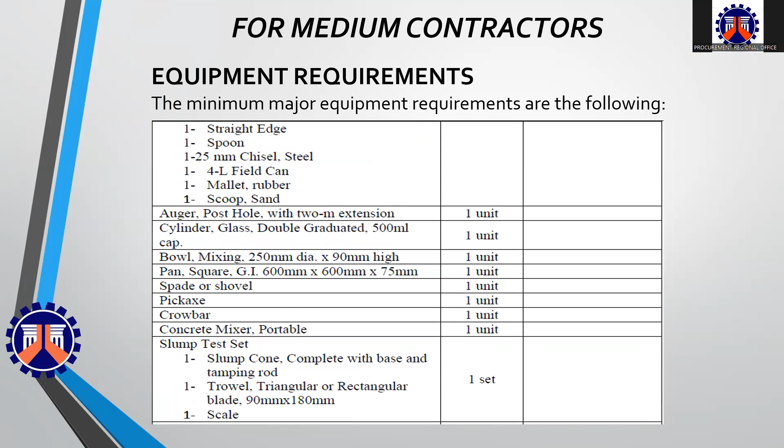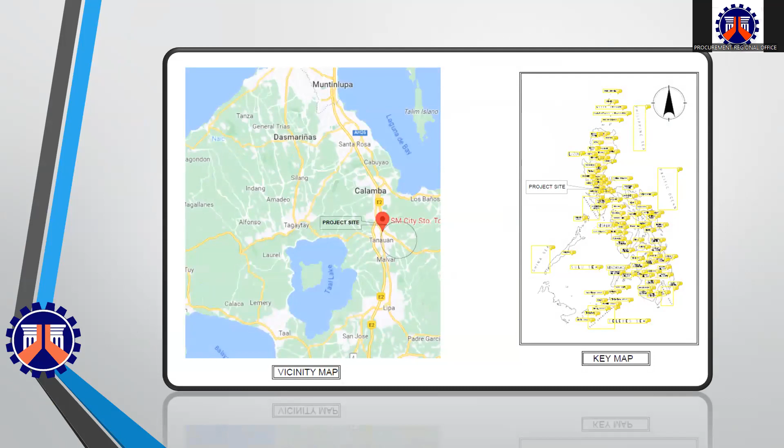Contract ID number 24D00076. Showing you the plans. Scope of work.

Asphalt overlay construct with 50 mm thick of item 310(1)c bituminous concrete surface wearing course and with 50 mm thick of item 310(2)c bituminous concrete surface binder course having a net length of 7.832 lane kilometer.

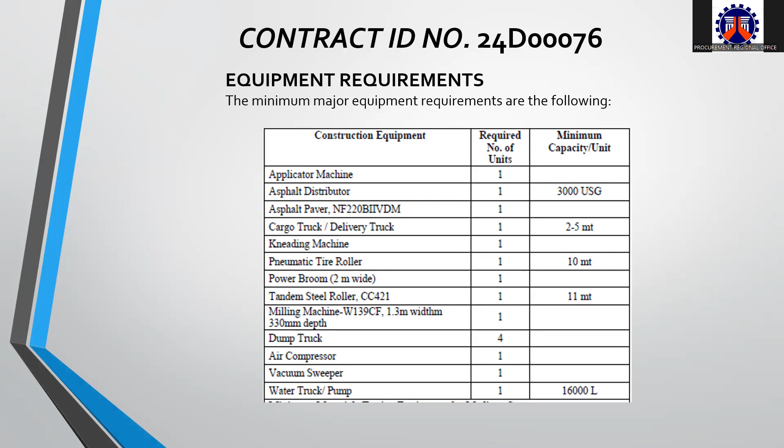Equipment requirements. Showing you the minimum major equipment requirements. Manpower requirements. The minimum work experience requirements for the key personnel are the following.

The approved budget for the contract is 153,630,895 pesos, and the contract duration is 300 calendar days.

The major category of works and the similar categories of works. The source of fund for the project is FY 2024 GAA for DPWH Infra Program.

For contract ID number 24D00095, showing you the vicinity map and key map.

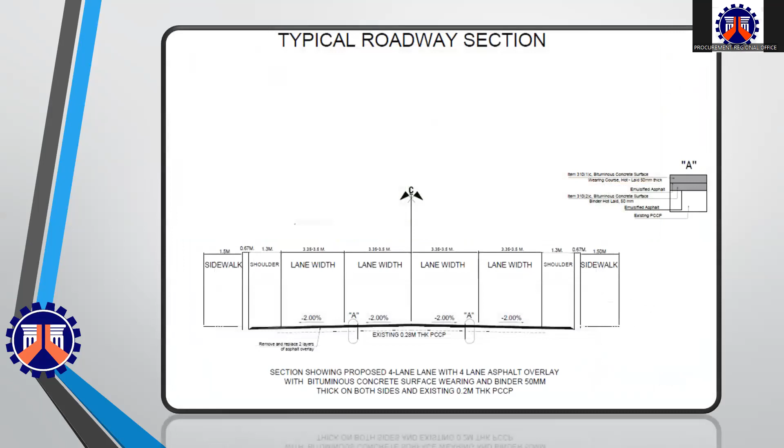Scope of work. Asphalt overlay of the Daang Maharlika, K56 to K56 plus 115 in Calamba, Laguna.

Existing asphalt overlay will be removed and replaced with 2 layers of bituminous concrete surface with anti-rutting additive 50 mm thick. Reflectorized thermoplastic pavement markings will be applied later.

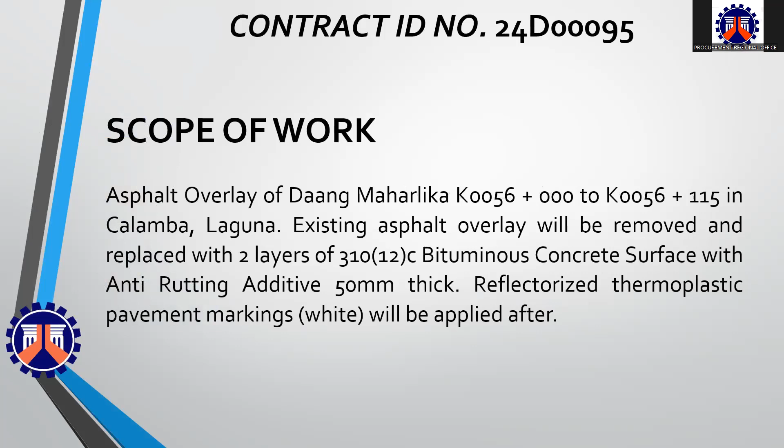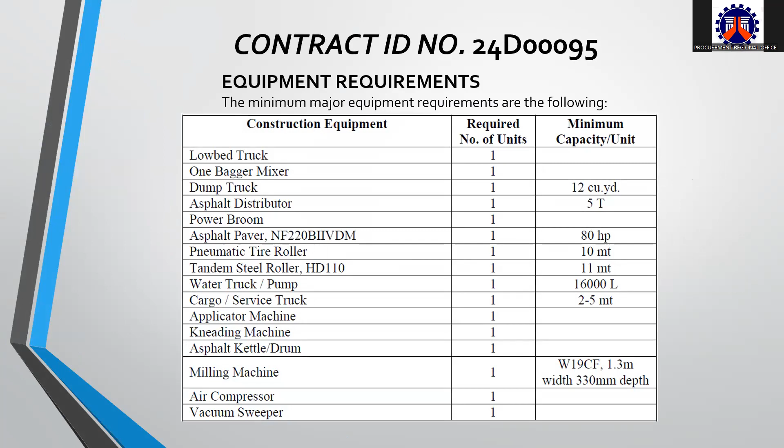Equipment requirements. The minimum major equipment requirements are the following. Manpower requirements. The minimum work experience requirements for the key personnel are the following.

The approved budget for the contract is 11,375,420 pesos, and the contract duration is 45 calendar days.

The major category of works and the similar categories of works. The source of fund of the project is FY 2024 GAA for DPWH Infra Program.

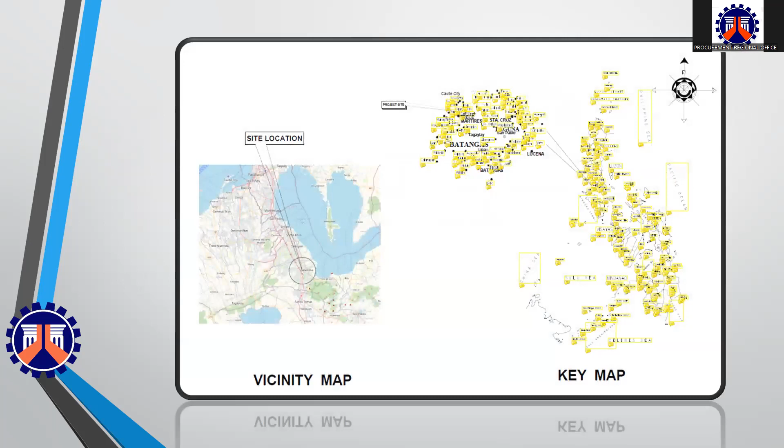Per contract ID number 24D00096, Rizal Shrine Road. Showing you the vicinity map and key map.

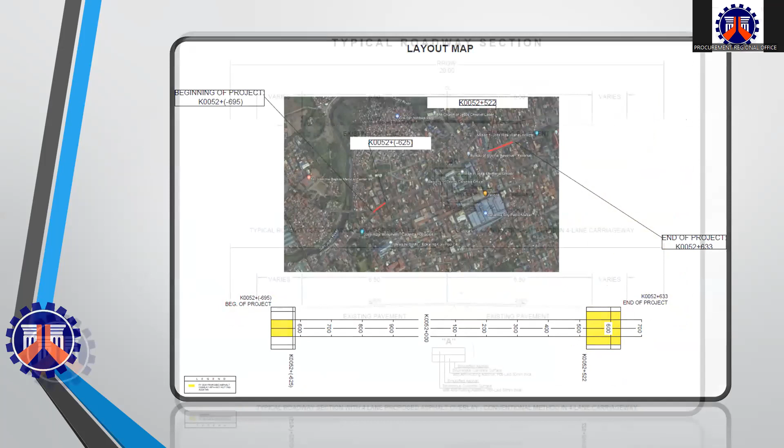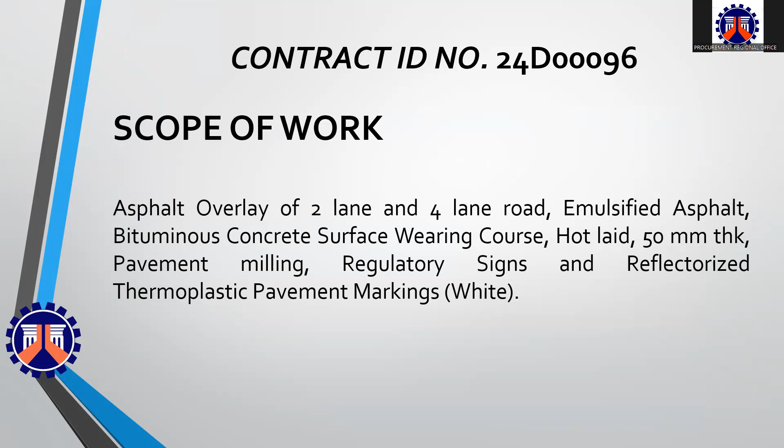Scope of work. Asphalt overlay of 2-lane and 4-lane road, emulsified asphalt, bituminous concrete surface wearing course, hot laid, 50 mm thick, pavement milling, regulatory signs, and reflectorized thermoplastic pavement markings.

The approved budget for the contract is 14,475,000 pesos. And the contract duration is 45 calendar days.

The major category of works and similar categories of works. The source of fund is FY 2024 GAA for DPWH Infra Program.

That's the end for the maintenance projects. The legal and financial will be discussed later together with the other projects.

Wala naman siguro, wala naman participants so walang expected na queries. Sige, mag-proceed lang tayo sa other projects.

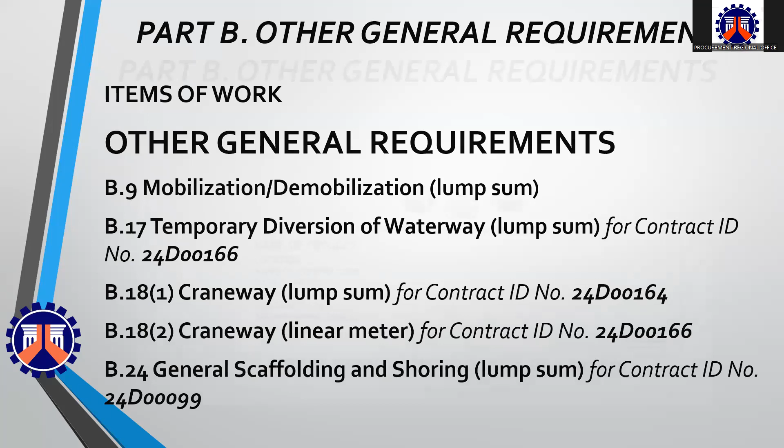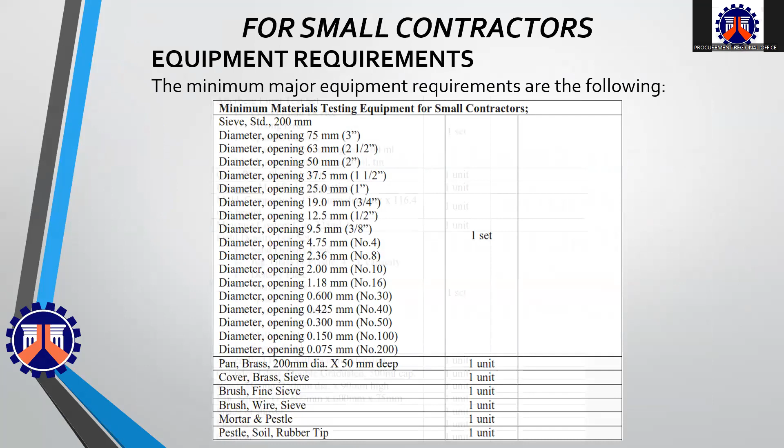Minimum material testing equipment for medium contractors for contract ID numbers 24D099, 110, 157, 164, 166, 167, 168, and 24D0111. Showing you the minimum major equipment requirements.

Contract ID number 24D099, Calamba Overpass along Manila South Road. Showing you the vicinity map, Calabarzon map, key map, and layout plan.

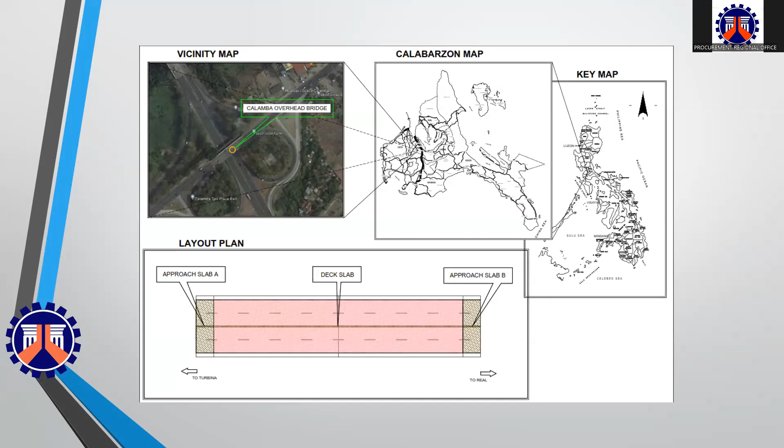General plan and general elevation, superstructure.

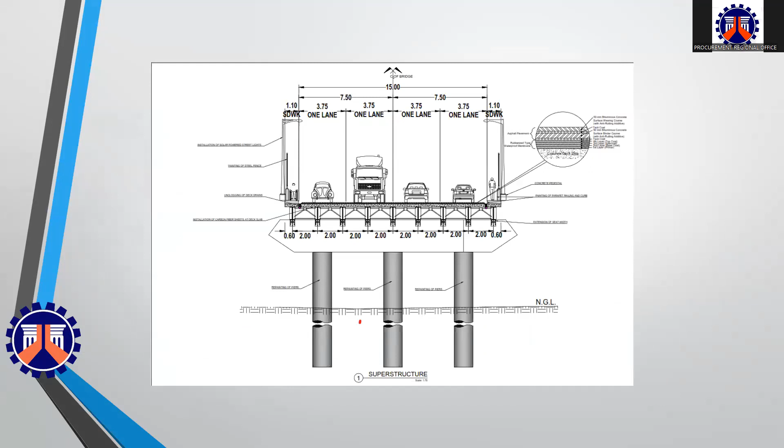Scope of work. The retrofitting of Calamba Overpass along Manila South Road involves earthworks using sub-base and base course, surface courses, bridge construction, drainage structure, and miscellaneous structure.

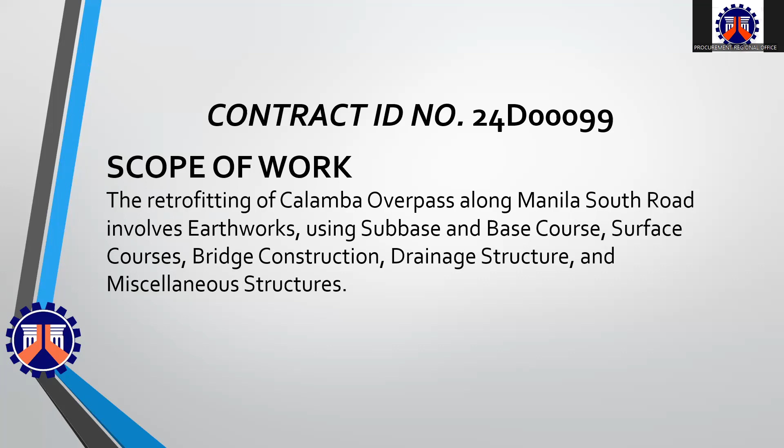Manpower requirements. For project manager, project engineer, and foreman, you should have at least 3 years of similar experience and 5 years of total work experience. For materials engineer, you should be a DPWH accredited materials engineer 1, and for construction safety officer, you should have a COSH training.

Approved budget for the contract is 42,283,405 pesos, and the contract duration is 195 calendar days.

Major category of works: bridges, rehabilitation, steel superstructure with cast-in-place piles, and showing you the similar categories of works.

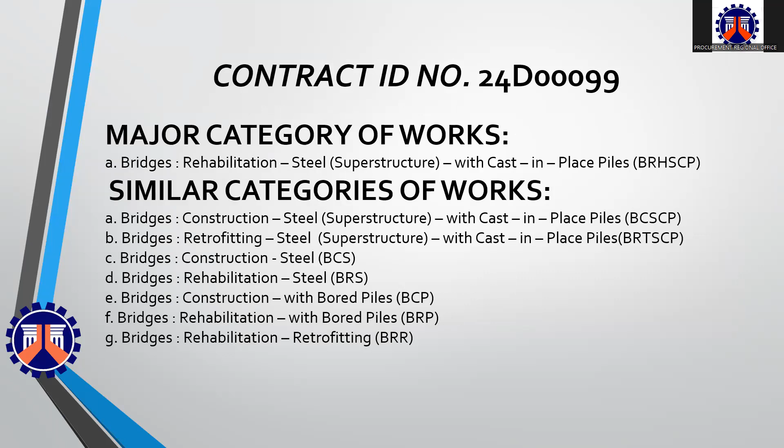The source of fund is FY 2024 GAA for DPWH Infra Program.

24D00110, installation of solar LED street light along Daang Maharlika at kilometer 70 plus 607 to kilometer 84 plus 949.

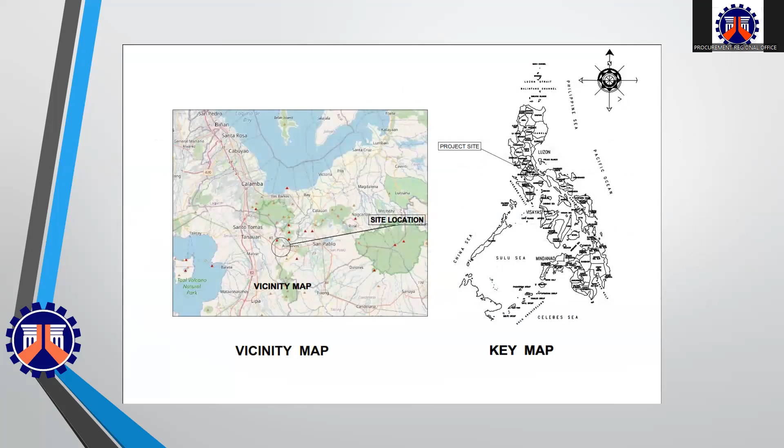Showing you the vicinity map, key map, layout plan, and typical roadway section.

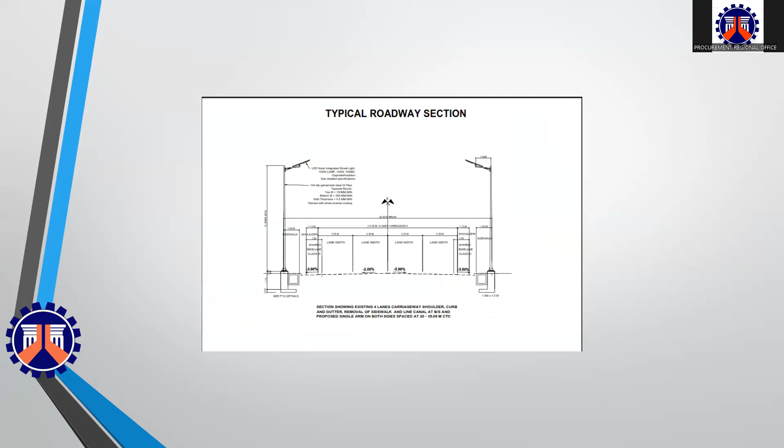Scope of work. Installation of 1,049 single-arm solar LED roadway lighting, 100 watts, 12-meter mounting pole with 1.5-meter single-mast arm, a staggered lighting arrangement including remove and install existing sidewalk and line canal.

Manpower requirements. For project manager, project engineer, and foreman, you should have a minimum of 3 years of similar experience and 5 years of total work experience. For materials engineer, you should be a DPWH accredited materials engineer 2. And for construction safety officer, you must have a COSH training.

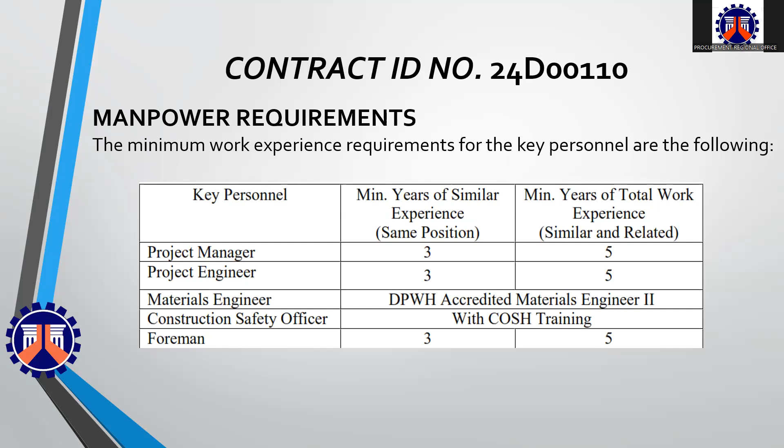The approved budget for the contract is 289,500,000 pesos, and the contract duration is 300 calendar days.

Major category of works: traffic engineering and management system, including road safety devices, TEMS, and showing you the similar categories of works.

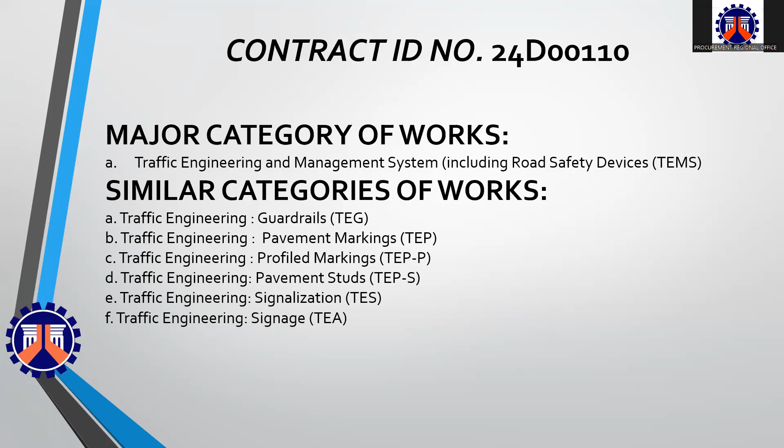The source of fund is FY 2024 GAA for DPWH Infra Program.

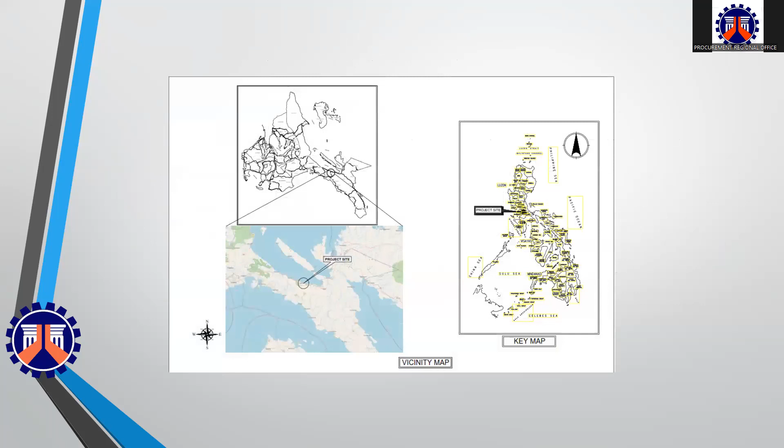Contract ID number 24D0157, Daang Maharlika LZ, kilometer 200 plus 770 to kilometer 201 plus 252. Showing you the vicinity map and key map.

Scope of work. Road widening from 2 lanes to 4 lanes, Portland cement concrete pavement road with macro synthetic fibers, 0.33 meter thick with a length of 972 lane meter, with 0.15 meter thick Portland cement stabilized road mix base course, new soil aggregate, and 0.15 meter thick aggregate sub-base course, surplus common excavation, embankment from roadway excavation, removal of structures and obstruction.

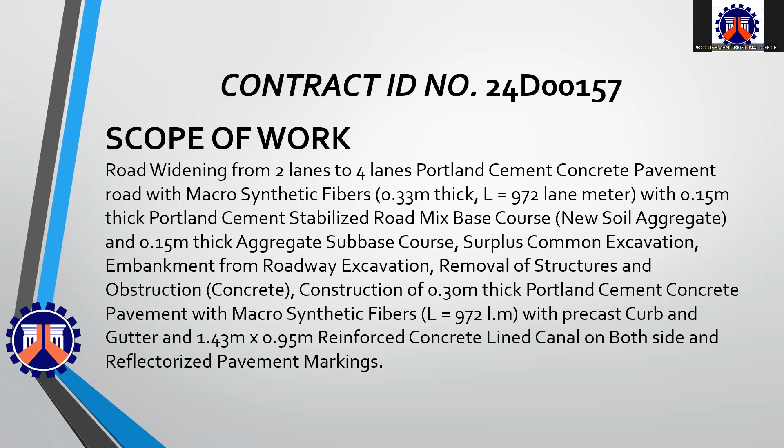Concrete, construction of 0.30 meter thick Portland cement concrete pavement with macro synthetic fibers with a length of 972 linear meter with precast curb and gutter, and 1.43 meter by 0.95 meter reinforced concrete lined canal on both sides and reflectorized pavement markings.

Equipment requirements, showing you the minimum major equipment requirements.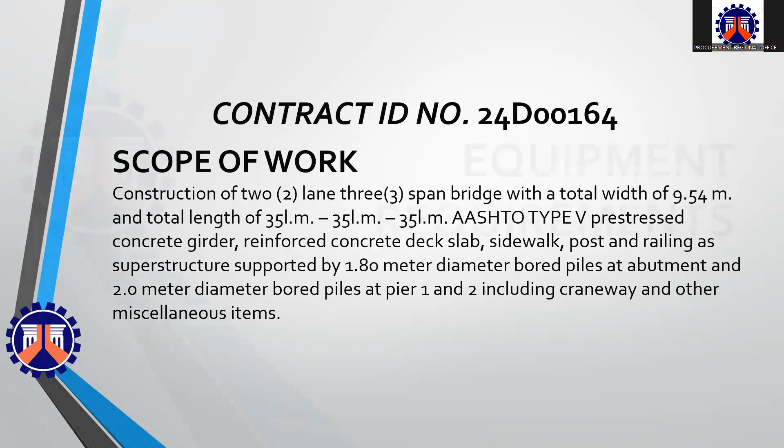Equipment requirements, showing you the minimum major equipment requirements.

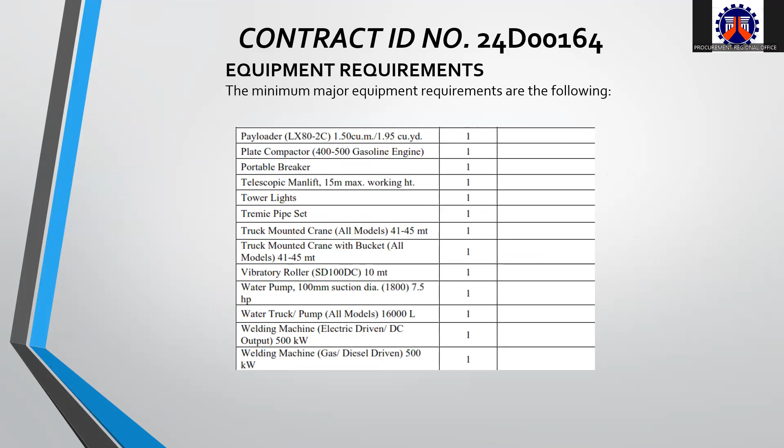Manpower requirements. For project manager, project engineer, and foreman, you should have at least 3 years of similar experience and 5 years of total work experience. For materials engineer, you should be a DPWH accredited materials engineer 1. And for construction safety officer, you must have a course training.

Approved budget for the contract and contract duration. The approved budget for the contract is 96,500,000 pesos and the contract duration is 300 calendar days.

Major category of works: bridge, construction, concrete, superstructure with cast-in-place piles. I'm showing you the similar categories of works.

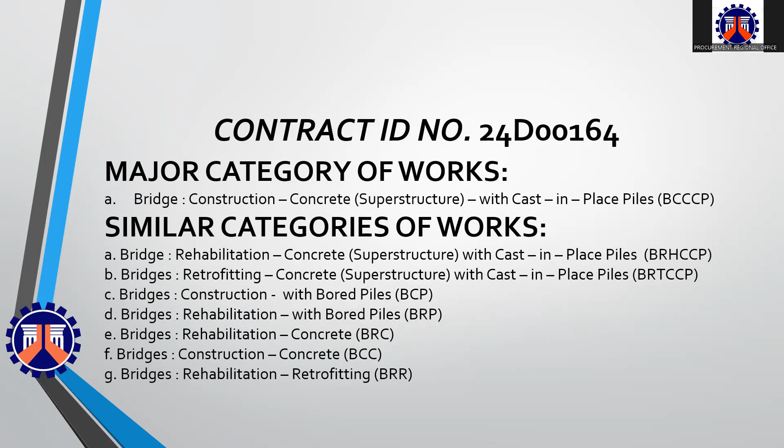The source of fund is FY 2024 GAA for DPWH Infra Program.

Contract ID number 24D0166, construction of revetment along Malaking Ilog River, downstream, Barangay Lipahan, San Juan, Batangas. Showing you the key map, Calabarzon map, vicinity map, and layout plan.

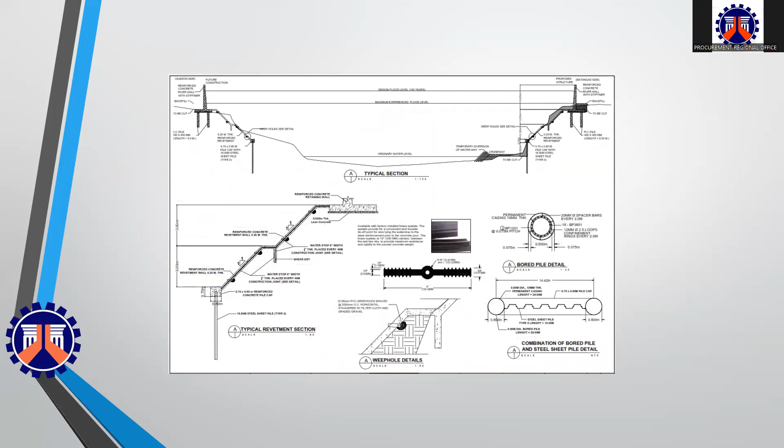Scope of work: construction of combined reinforced concrete revetment and retaining wall. For reinforced concrete revetment, construction of 0.20 meter thick revetment with 100 millimeter diameter PVC weepholes spaced at every 2 meters, staggered, supported by 0.8 by 0.7 meter pile cap with combined 0.8 meter diameter concrete drill piles.

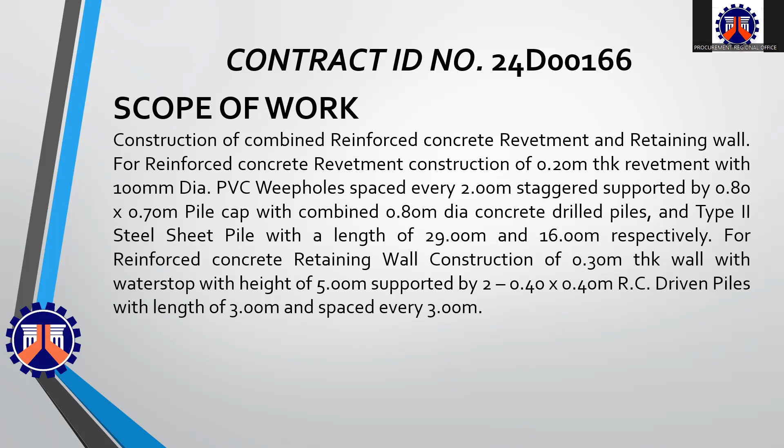And type 2 steel sheet pile with a length of 29 meter and 16 meter respectively. For reinforced concrete retaining wall, construction of 0.30 meter thick wall with water stop with height of 5 meters supported by 2 - 0.4 by 0.4 meter reinforced concrete driven piles with length of 3 meter and spaced every 3 meter.

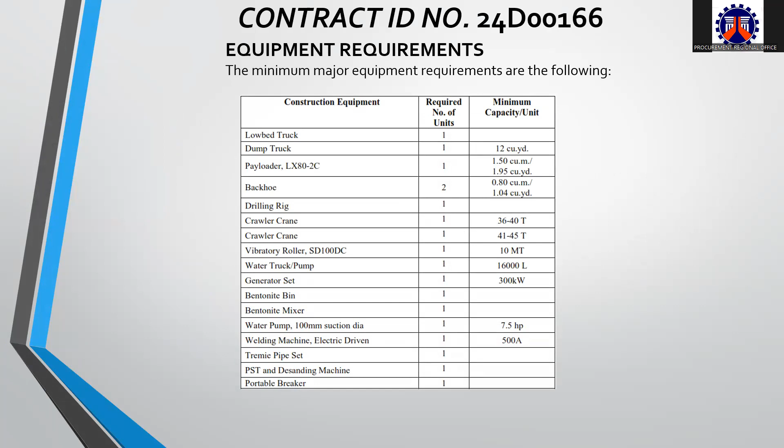Equipment requirements. Showing you the minimum major equipment requirements. Showing you the manpower requirements.

The approved budget for the contract is 148,500,000 pesos and the contract duration is 300 calendar days.

Major category of works: flood control, construction, drainage, closed and open conduits, FCN. Showing you the similar categories of works. The source of fund is FY 2024 GAA for DPWH Infra Program.

Contract ID number 24D0167, construction of flood control structure along Agos River in Infanta, Quezon, Package 1. Showing you the key map, Calabarzon map, and layout plan. Typical section.

Scope of work: construction of 350 linear meter dikes segmented every 50 meter with 0.2 meter thick reinforced concrete revetment and 0.6 meter thick rubble concrete with 5 meter crest width, and construction of 4 meter width reinforced PCCP 0.28 meter thick.

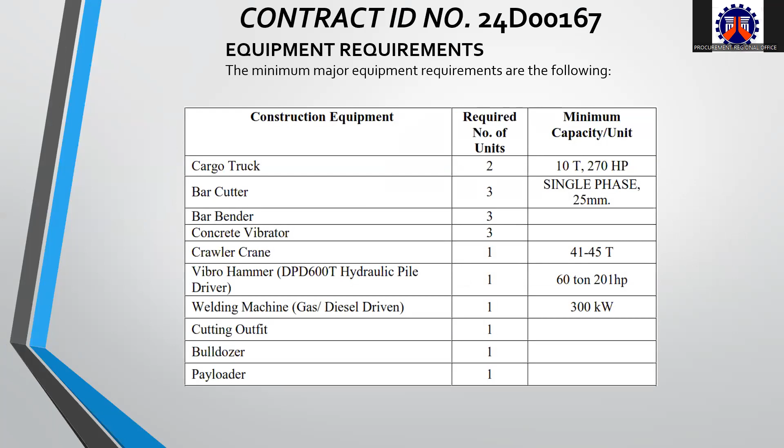Showing you the minimum major equipment requirements. Showing you the manpower requirements.

The approved budget for the contract is 193 million pesos and the contract duration is 300 calendar days.

Major category of works: flood control, construction, drainage, closed and open conduits, FCN. Showing you the similar categories of works. The source of fund is FY 2024 GAA for DPWH Infra Program.

Contract ID number 24D00168, construction of flood control structure along Agos River in Infanta, Quezon, Package J. Showing you the key map, CALABARZON map, and layout plan.

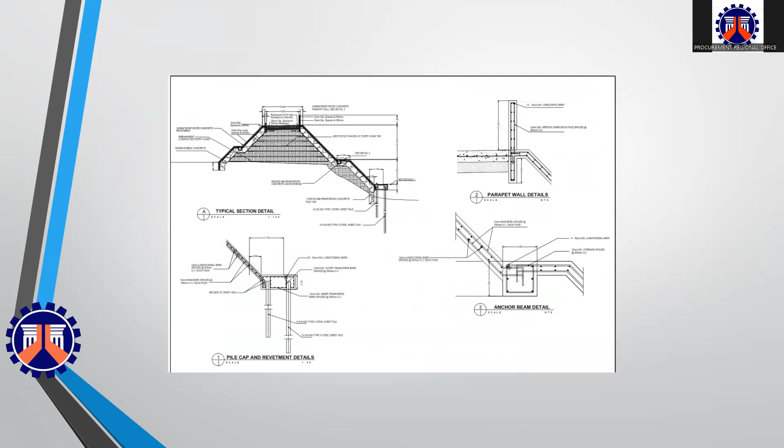Scope of work: construction of 350 linear meter dike segmented every 50 meter with 0.2 meter thick reinforced concrete revetment and 0.6 meter thick rubble concrete with 5 meter crest width, and construction of 4 meter width reinforced PCCP 0.28 meter thick.

With subbase of 0.25 meter thick supported by 1.7 meter by 0.7 meter pile cap with 12 meter and 6 meter type 2 steel sheet pile at front and back of the pile cap respectively.

For every 50 meter in length of the project, there is a construction of end section consists of 0.2 meter thick reinforced concrete with 0.6 by 0.6 meter pile cap with 6 meter type 2 steel sheet pile.

The approved budget for the contract is 193 million pesos and the contract duration is 300 calendar days.

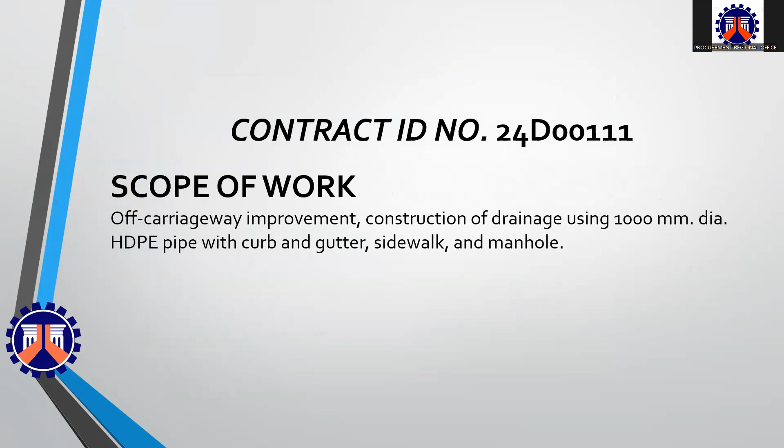Equipment requirements, showing you the minimum major equipment requirements. Showing you the manpower requirements.

The approved budget for the contract is 140,083,265 pesos, and the contract duration is 225 calendar days.

Contract ID number 24D0128, rehabilitation, reconstruction, upgrading of damaged paved roads along the DAANG MAHARLIKA LZ at kilometer 123 plus 85 to kilometer 123 plus 125.

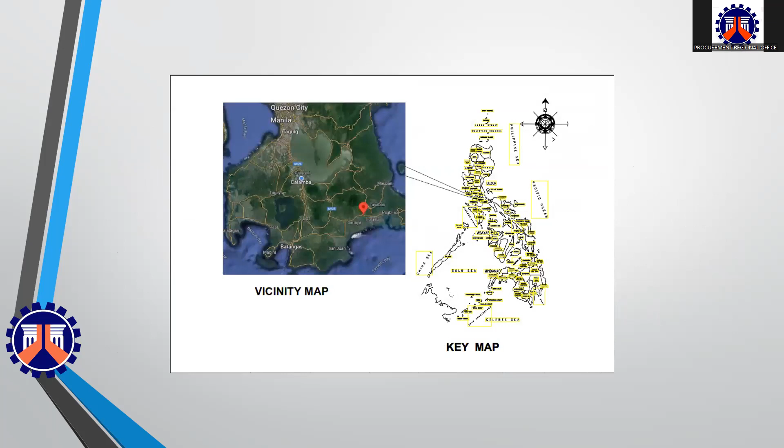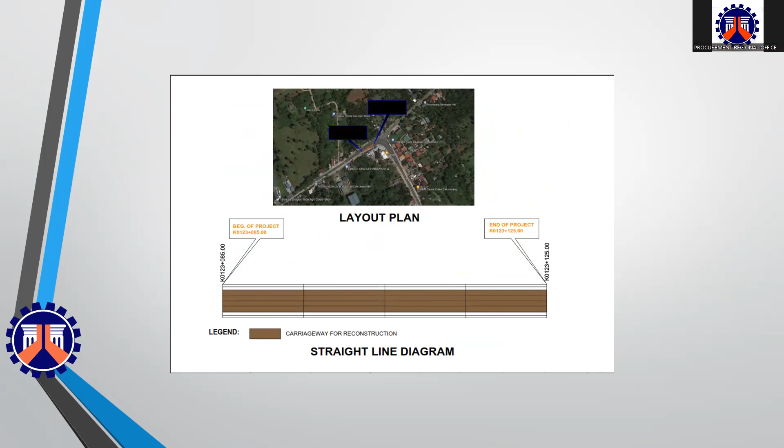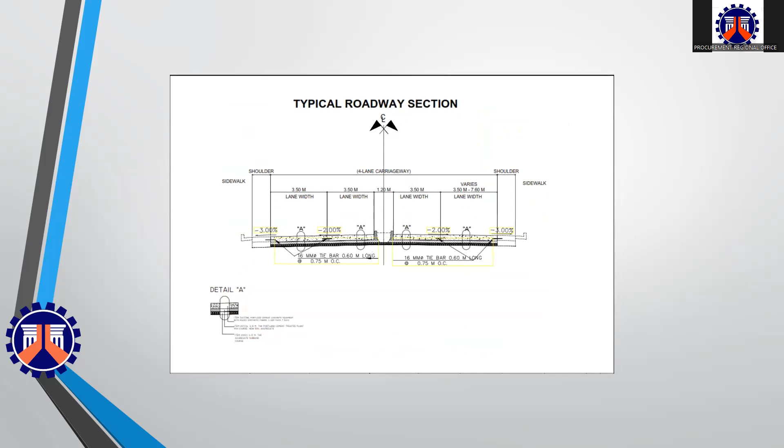Scope of work: reconstruction of 0.16 lane kilometer carriageway from kilometer 123 plus 85 up to kilometer 123 plus 125 at Tayabas, Quezon.

The approved budget for the contract is 3,860,000 pesos, and the contract duration is 45 calendar days.

Major category of works: roads, construction, PCCP, RCP, and showing you the similar categories of works. The source of fund is FY 2024 GAA for DPWH Infra Program.

Contract ID number 24D00135, DAANG MAHARLIKA LZ, from kilometer 111 plus 735 to kilometer 112 plus 88.

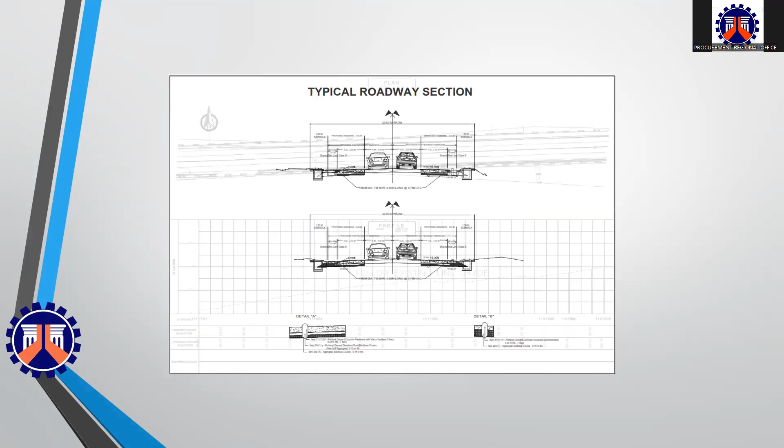Showing you the key map and vicinity map. Layout map and straight line diagram. Typical roadway section. Plan and profile.

Scope of work: road widening from 2 to 4 lanes with aggregate subbase, 0.15 meter thick, Portland cement stabilized road mixed base course, 0.15 meter thick, and Portland cement concrete pavement with macro fibers, 0.33 meter thick, 7 days.

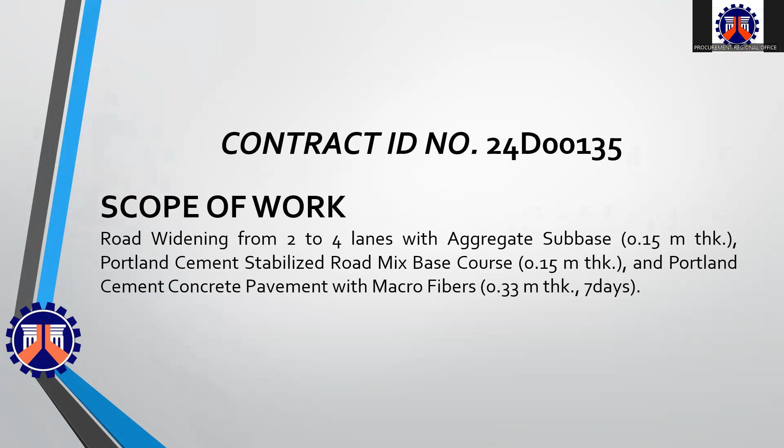The approved budget for the contract is 60,646,250 pesos, and the contract duration is 120 calendar days. Major category of works: roads, construction, PCCP, RCP, and similar categories of works. The source of fund is FY 2024 GAA for DPWH Infra Program. Contract ID number 24D00152, Daang Maharlika LZ, from kilometer 225 plus 58 to kilometer 225 plus 98.

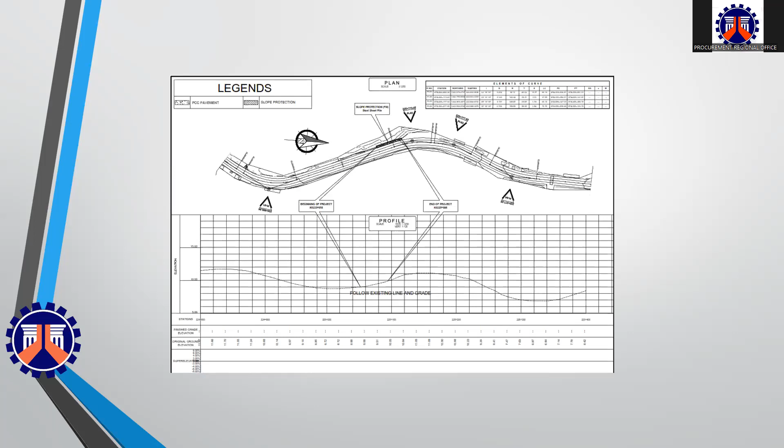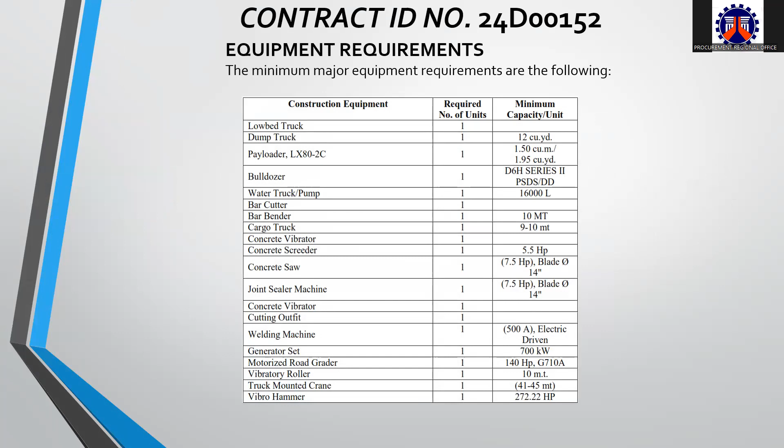Scope of work: slope protection structure using steel sheet pile type 2 and construction of PCCP shoulder 0.23 meter thick. Showing you the minimum major equipment requirements and manpower requirements.

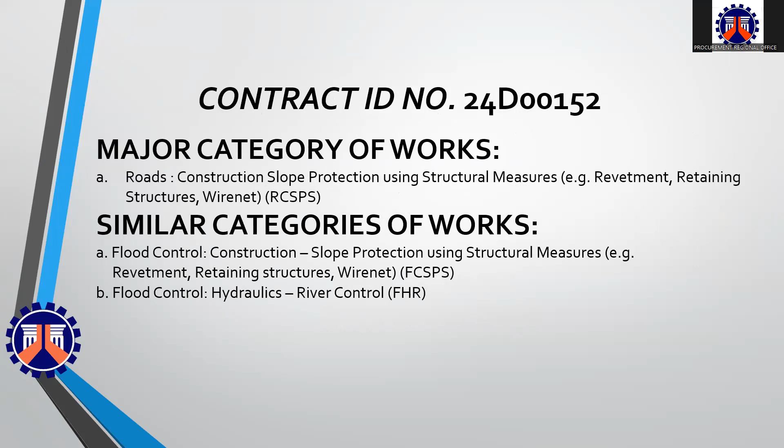The approved budget for the contract is 9,650,000 pesos and the contract duration is 105 calendar days. Major category of works: roads, construction, slope protection using structural measures, and similar categories of works. The source of fund is FY 2024 GAA for DPWH Infra Program.

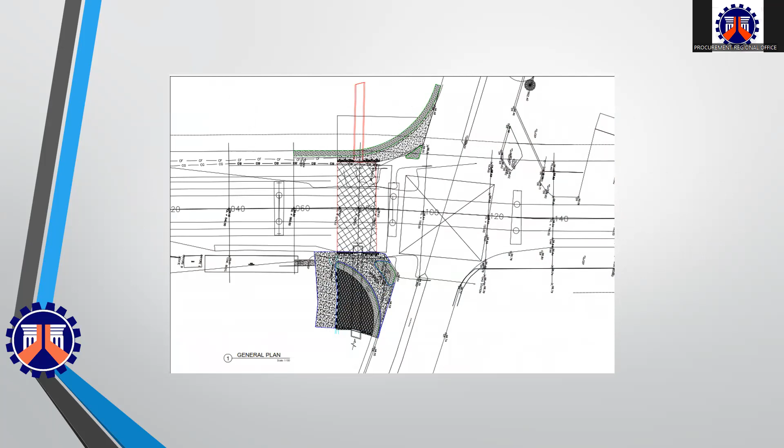And lastly, contract ID number 24D00165, Molino Bridge along Bacoor, Dasmariñas National Road. Showing you the key map, Calabarzon map, vicinity map, layout plan, general plan, general elevation, and general section.

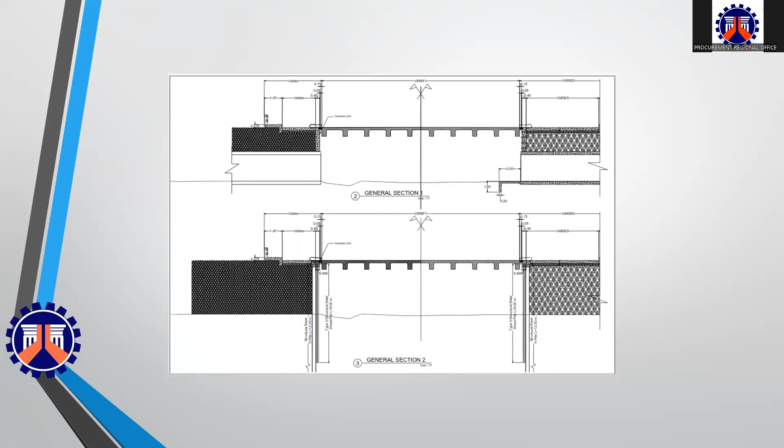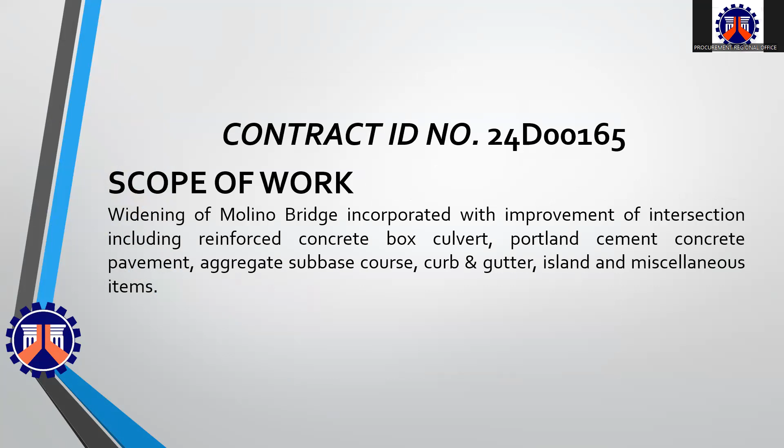Scope of work: widening of Molino Bridge incorporated with improvement of intersection including reinforced concrete box culvert, Portland cement concrete pavement, aggregate sub-base course, curb and gutter, island, and miscellaneous items. Showing you the minimum major equipment requirements and manpower requirements.

The approved budget for the contract is 13,992,500 pesos and the contract duration is 210 calendar days. Major category of works: bridges, construction, concrete superstructure with driven piles, and similar categories of works. The source of fund is FY 2024 GAA for DPWH Infra Program.

Thank you. That's all for the technical component of the pre-bid. Let me proceed to the legal and financial component of the pre-bid.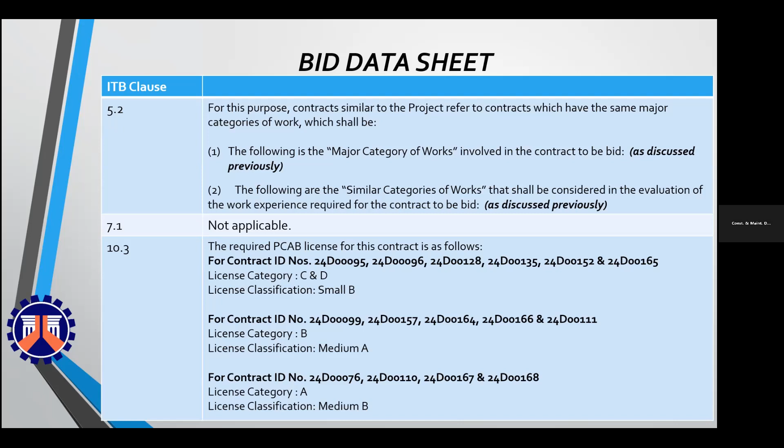ITB Clause 22, bid submission may be done manually or electronically online. However, bidders should only select one mode of submission, either manual or electronic. The address for receipt of bid submitted manually is at the Bidding Room, DPWH Region 4A, Canlubang Interchange, Barangay Mayapa, City of Calamba, Laguna, and electronically should be submitted at electronicbids_R4A at dpwh.gov.ph. The deadline for receipt of bids is on February 13, 2024 at 10 a.m.

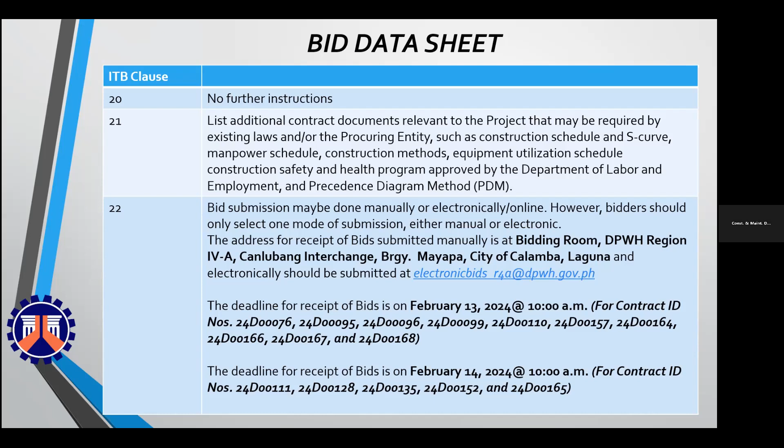This applies for contract ID numbers 24D076, 95, 96, 99, 110, 157, 164, 166, 167, and 168. And on February 14, 2024 at 10 a.m., for contract ID numbers 24D0111, 128, 135, 152, and 165. For bids to be submitted electronically or online, the following procedures should be observed following Department Order Number 87, Series of 2020.

GCC Clause 4.1: the procuring entity shall give possession of the site to the contractor upon receipt of the notice to proceed. The start date should not be later than 7 calendar days from the issuance date of the receipt of the notice to proceed.

GCC Clause 7.2: In case of semi-permanent structures such as buildings of types 1, 2, and 3 as classified under the National Building Code of the Philippines, concrete asphalt roads, concrete river control, drainage, irrigation line canals, river landing, deep wells, rock causeway, pedestrian overpass, and other similar semi-permanent structures, the warranty is 5 years. This applies to contract ID numbers 24D076, 95, 96, 110, 157, 166, 167, 168, 111, 128, 135, and 24D0152.

And in case of permanent structures such as buildings of types 4 and 5 as classified under the National Building Code of the Philippines, and other structures made of steel, iron, or concrete which comply with relevant structure codes, such as but not limited to steel concrete bridges, flyovers, aircraft movement areas, ports, dams, tunnels, filtration and treatment plants, sewerage systems, power plants, transmission and communication towers, railway system, and other similar permanent structures, the warranty is 15 years. This applies for contract ID numbers 24D099, 164, and 24D0165.

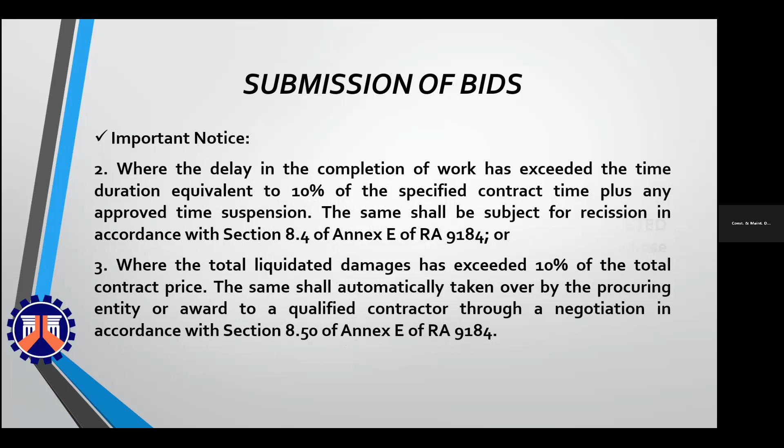Work experience in similar contracts: prospective bidder must have done a single largest completed contract or SLCC similar to the contract to be procured, and whose value at current prices is at least 50% of the ABC to be bid.

GPPB NPM number 150 series of 2016: a temporary PCAB certificate of license cannot substitute the requirements of submitting a valid PCAB license as part of eligibility requirements.

Thank you. That's all for the legal and financial components of the PBD.

Let me proceed to the electronic submission of bids.

Electronic submission and receipt of bids. This is for the efficient conduct of procurement activities during a state of calamity or implementation of community quarantine or similar restrictions, authorizing the submission and receipt of bids through electronic means or email.

Our legal references for the submission of bids electronically are Department Order Number 87, Series of 2020, GPPB Resolution Number 9, 2020, dated May 7, 2020, and the 2016 revised IRR of RA 9184. Prospective bidders shall prepare and submit their bids electronically following the steps prescribed under DO 87, 2020 in accordance with GPPB Resolution Number 9, 2020 as follows.

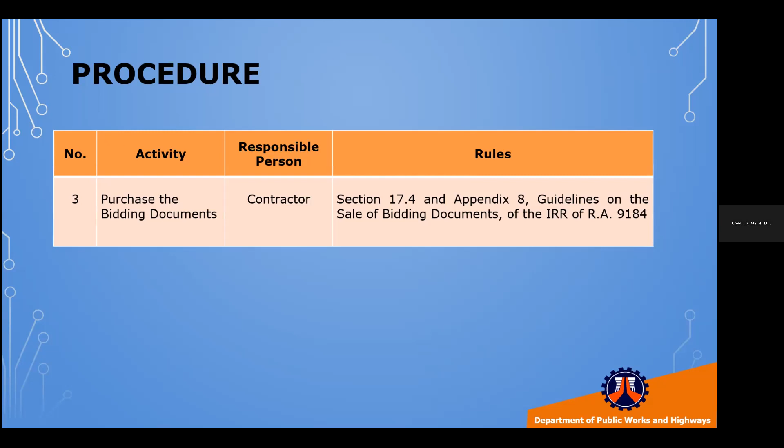Prior to the deadline of submission of bids, the prospective bidders shall send an email with subject Official Receipt for Contract ID to electronicbids_R4A@dpwh.gov.ph. Attached to the said email is the copy of the official receipt of purchase of bidding documents in portable document file PDF format, with file name in the format PCAB ID underscore contract ID underscore official receipt dot PDF.

For example, the file name of the attached PDF containing the official receipt of the contractor with PCAB ID number 12345, who intends to participate in the bidding of contract ID number 21D00001, shall be 12345 underscore 21D00001 underscore official receipt dot pdf. Further, the email subject would be Official Receipt for 21D00001.

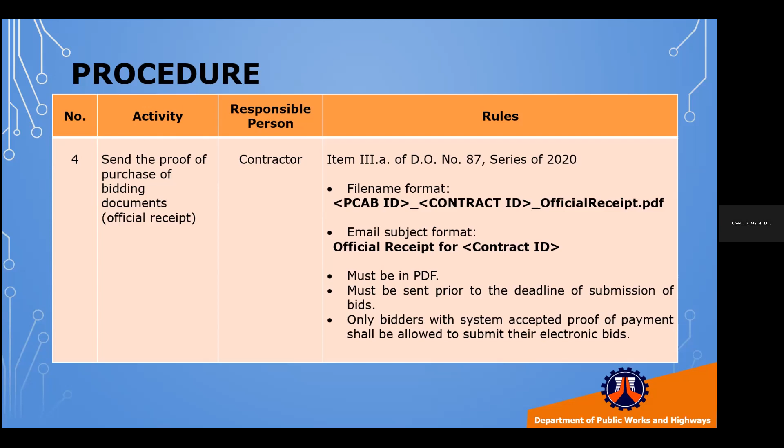Upon submission of electronic proof of purchase of bidding documents or the OR, the contractor may now send its electronic bid with file name format PCAB ID underscore contract ID underscore bid dot zip or dot rar or dot 7z, with email subject format Bid Submission for Contract ID.

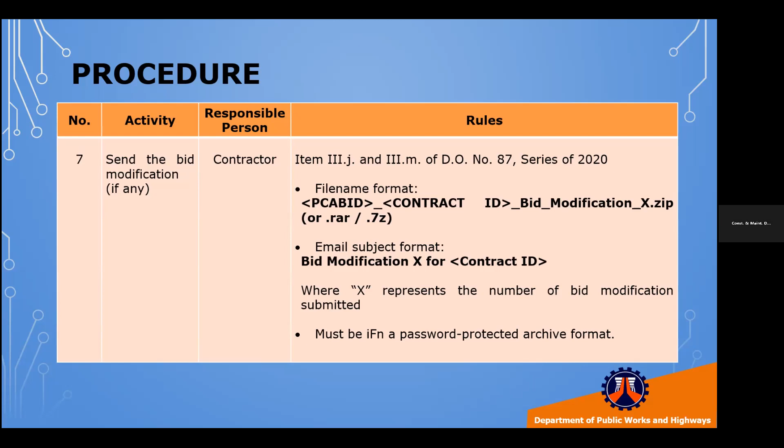This is the same in the prescribed format in the preparation and submission of electronic bid, except that the bid modification main archive file folder shall be labeled as PCAB ID underscore contract ID underscore bid modification underscore X dot zip or dot rar or dot 7z.

In case a prospective bidder who purchased a bidding document decides not to participate, he may submit his letter of non-participation manually or electronically. For electronic submission, the contractor shall send an email with the subject 'Non-participation for Contract ID' with the letter of non-participation attached, file name formatted as PCAB ID underscore contract ID underscore non-participation.pdf. This email should be sent to electronic bids underscore R4A at dpwh.gov.ph before the deadline for bid submission.

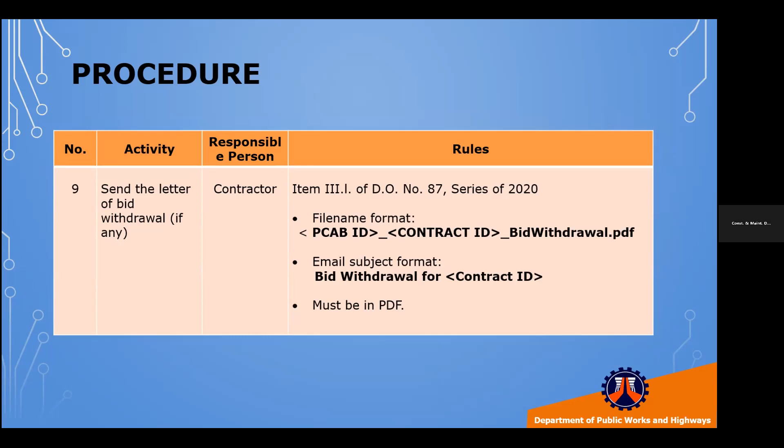Bids may only be withdrawn prior to the deadline for bid submission. In case of withdrawal of an electronic bid, the bidder shall send an email with the subject 'Bid Withdrawal for Contract ID' and attach the letter of bid withdrawal in PDF format, file name PCAB ID underscore contract ID underscore bid withdrawal.pdf. This email should be sent to electronic bids underscore R4A at dpwh.gov.ph before the deadline for bid submission.

The BAC Secretariat shall close the contract ID folder in the eBid portal on the deadline of submission and receipt of bids. This is the closed contract ID folder in the eBid portal. The BAC Secretariat shall download the bids from the eBid portal to the local computer.

Only during the actual opening of bids shall the bidder disclose the passwords for his electronic bid. This can be done by the bidder's authorized representative verbally in person, through phone call, online platforms, or through writing. In all cases, bidders will have only 3 attempts or 15 minutes, whichever comes first, to provide the correct password. Otherwise, the bidder shall be disqualified except in unforeseen justifiable circumstances. The bidder may also be subjected to the three-strike policy as warranted by the circumstances.

If the bidder chooses to disclose the password through phone call, he should make sure that the contact numbers as recorded in the Civil Works application are open when the BAC calls to ask for the password. The bidder may also choose to call the BAC number during the bid opening time and wait for the opening of his bid to disclose the password.

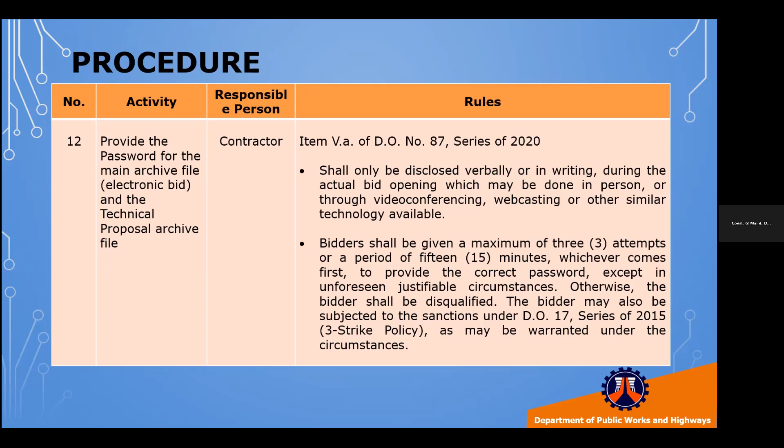All electronic bids, password-protected compressed archive main file folders, shall be opened first for the opening of the technical component compressed archive file folders. This shall be followed by the opening of the bids submitted manually for the opening of the technical component envelopes. The same procedures apply for the financial component compressed archive file folders and financial component envelopes. The BAC Secretariat shall open the financial proposal archive file.

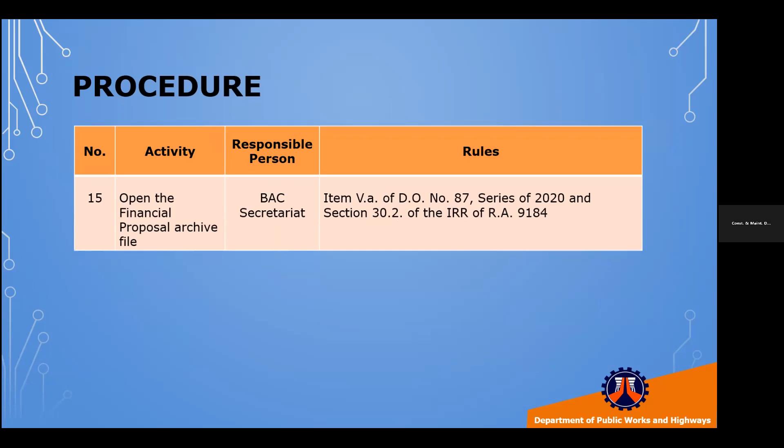Notes and reminders for the contractors in the preparation and submission of bids.

Only bidders with system-accepted proof of payment shall be allowed to submit their electronic bids, which shall not be beyond the deadline specified for the submission of bids.

An email shall also be received by a prospective bidder in instances where their sent email related to the submission of electronic OR or purchase of the bidding documents has an incorrect subject contract ID, meaning a corresponding folder with the same contract ID does not exist in the eBid portal; if it has no attachment; if it has an attachment but not in the prescribed format; if it has more than one attachment; or if it was received after the deadline of bid submission. For these cases, the prospective bidders should rectify or correct the noted deficiencies to comply with the requirements for its electronic bid to be accepted.

The bidders must submit their electronic bid using the registered email address in the Civil Works Application. In case prospective bidders are not yet registered in the CWA, they can use any email address subject to the verification of the BAC Secretariat.

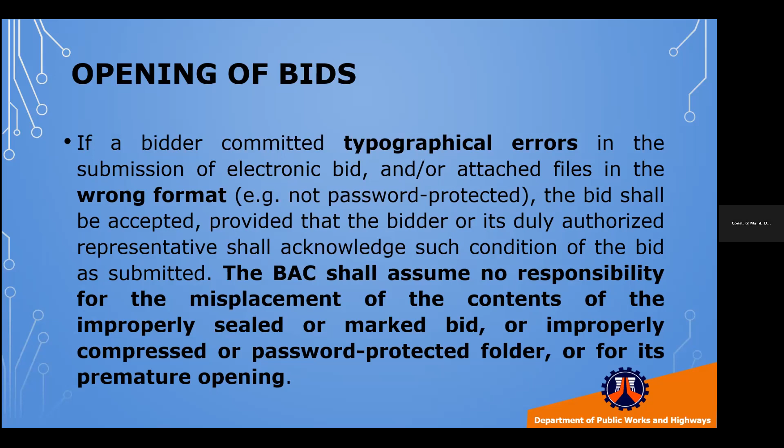If a bidder committed typographical errors in the submission of an electronic bid or attached files in the wrong format, the bid shall be accepted, provided that the bidder or its duly authorized representative shall acknowledge such condition of the bid as submitted. The BAC shall assume no responsibility for the misplacement of the contents of the improperly sealed or marked bid, or improperly compressed or password-protected folder, or for its premature opening.

If an electronic bid or file was found to be damaged and could not be extracted or opened, the bid shall be considered failed.

Notes and reminders for non-participation and bid withdrawal. In case of non-participation and withdrawal of bids, the BAC Secretariat shall check the letters of non-participation and bid withdrawal received in the dedicated email address and stored in the eBid portal, and shall observe the provisions under Section 26.2 of the IRR of RA 9184 and DO 17 Series of 2015.